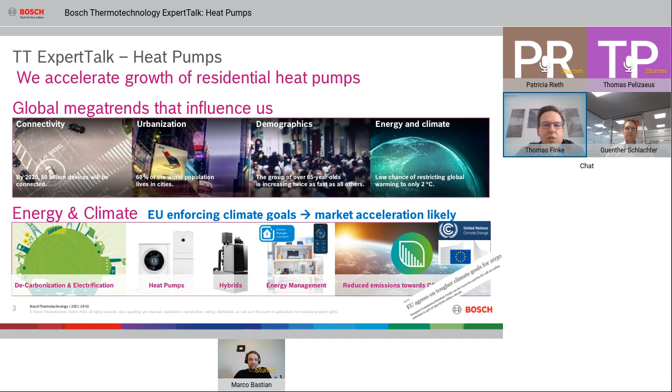Having a look to the market of heat pumps today, we already saw a sustainable growth over the last year. The last decade has shown a really good decade for heat pumps. Nevertheless, on the right-hand side, you can see that still only 15% of share is by heat pumps made in the European heating market. So there's much more potential.

This is also underlined by looking to the following three graphs, where we can see the share per country in terms of percentage. There we have countries, especially high up in the north of Europe, where we have a good share of heat pumps in the residential heating market. Some markets exceeding even 90%, like Sweden, which Styrbjörn will later elaborate upon. But then there are markets with only double-digit or even single-digit figures in the lower numbers down there, so giving a high potential for the heat pump market there to come for Europe to really make an effort in achieving EU climate goals by 2030.

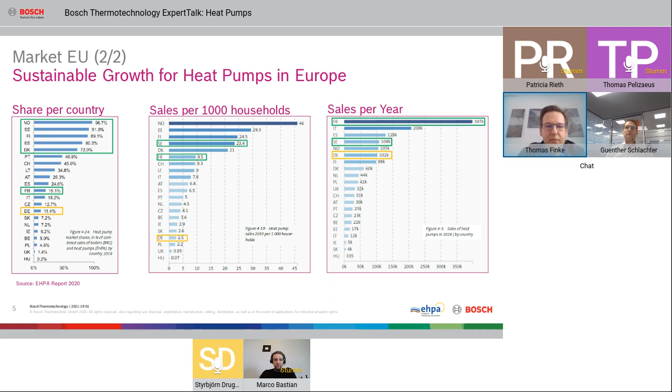This is leading us to our vision. So which part does Bosch want to play in this more and more electrified market targeting to achieve climate goals? Our vision is to electrify European homes. Our vision is to build the energy transition to build a better life for us and the generations to come. Or as Greta Thunberg says, we only have one world.

I'm lucky to have two daughters, but my motivation is that we are really giving to them a good and clean world. Therefore, we are enlarging our portfolio. We are investing hugely into our sales organization to partner the way to mass deployment of heat pumps in Europe, in which we are investing more than 100 million euros.

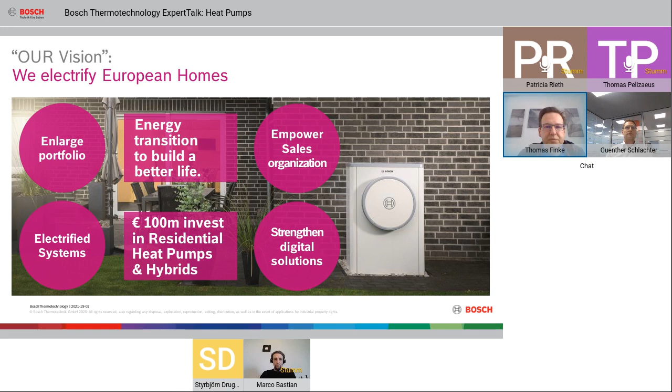Having said that, we are investing so much money into heat pumps. I also want to address a bit an organizational topic or a discussional topic which is ongoing at the moment in Europe. We see too many clashes of technologies, like is it now hybrid the best one, is hydrogen the best one, or heat pumps the best one?

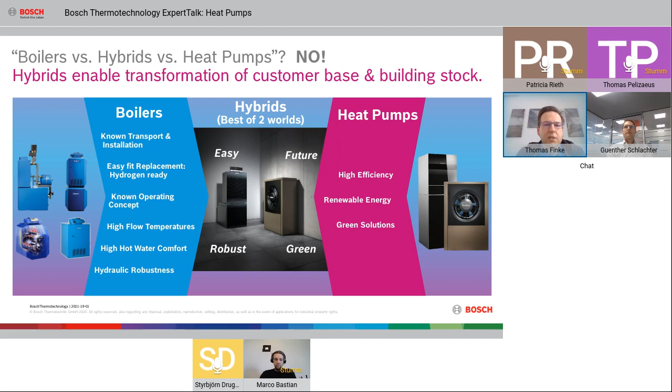My simple answer is climate change is driven by multiple aspects. Therefore, we need multiple weapons against climate change. Hydrogen, heat pumps, and hybrids are all solutions which can help us to decelerate climate change and to build a better life for our kids and next generations to come.

Our approach is that we have to address the markets according to their needs, to give customers what they want. And therefore, we have dedicated our approach into the 3 regions of Europe, namely North, Middle, and Southern Europe. Whereas now Styrbjörn will give us an insight how our marathon has started towards reaching EU climate goals 2030 and what role Bosch is playing into that. Styrbjörn, please carry on.

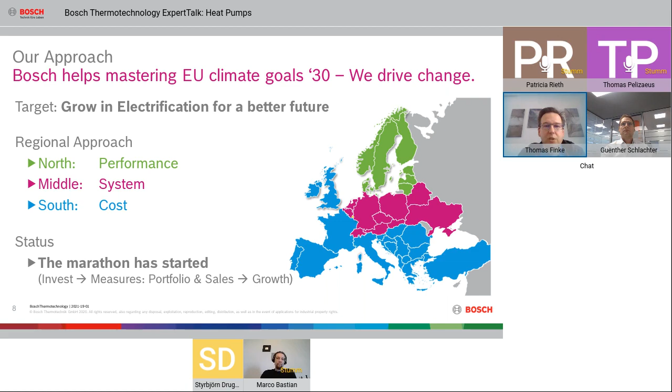Hello, everybody. Please confirm that you can hear me now. Am I on? Do you hear me? Yes. Can you hear me?

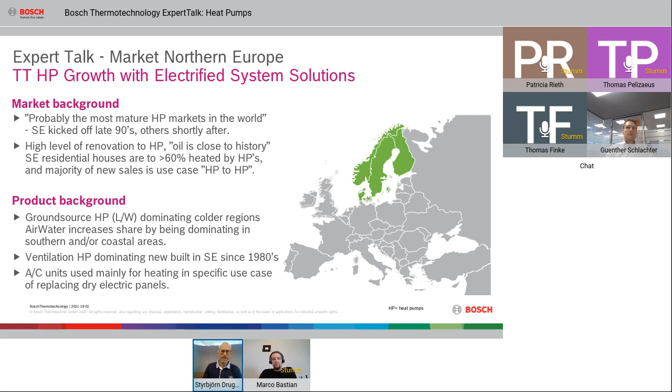This is zooming into the Swedish situation, basically residential focus, and here you see the same figure, 59% in 2018, meaning that we are currently above 60% using any type of heat pump. Runner-up to the heat pumps is wood pellet, which consists of 20%, followed by district heating of about 15%. So existing houses are dominated by heating by heat pumps.

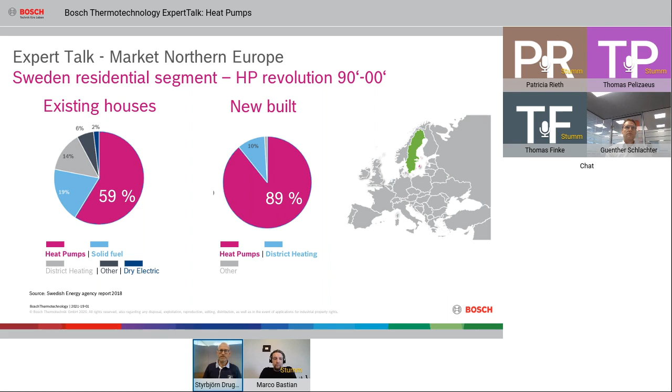In the new build sector, almost 90% are using the heat pump as the heat source when you build a new house. This is a mix of the utmost favorite, the ventilation heat pump or exhaust air heat pump, as we say internally, followed by liquid water to some share and a minor part air water. Runner-up there also is district heating in the urban areas, of course. So next slide, please.

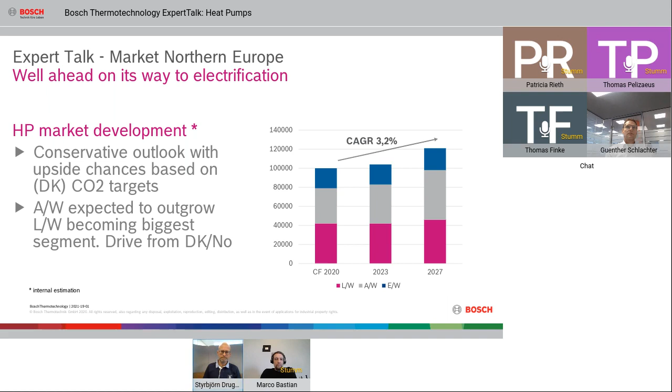So then you can, for yourself, imagine that the use case will also shift, considering that it's a market which is consolidating its electrification. As of now, our own in-house predictions say that about every fourth heat pump sold is in a use case where you shift an old heat pump to a new one. In '27, it will be almost half of the sales that consist of this heat pump to heat pump sales. And that has an impact on how you sell the product and what benefits the customer gets out of it.

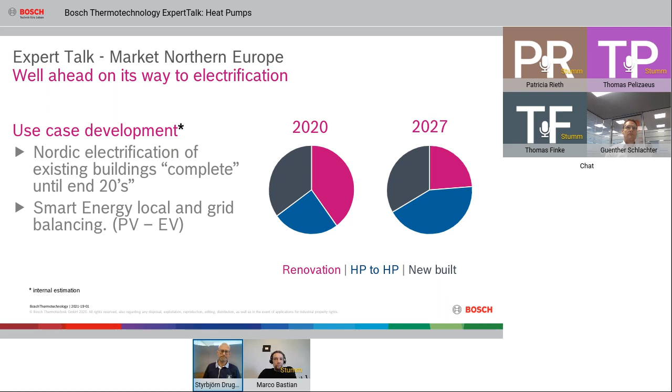Also, one takeaway is that when you have such a high penetration of heat pumps in an electrifying market, there will also be a need for integration towards electric vehicles. For the last December month in Sweden, 40% of the newly sold cars were actually EVs. So 40% of total sales was some kind of EV car. So that is one takeaway when it comes to what it means to be in an electrified area like the Nordics are, and will be even more so in '27. So next slide, please.

Okay, for the use case in terms of new build and existing building, what are now the expectations of customers wanting to use heat pump technology in the future? Well, for the new build, it's about finding the way to integrate even more into a newly built house, following the expectation of hassle-free operation, making it easy to install towards the interfaces, using as little space as possible, because every square meter counts in a new built house. So the new build sector will continue to drive a big share of the volume in the Nordics, emphasized by the development of the heat pumps, of course.

Existing build: you just learned that the majority of the sales was actually heat pump to heat pump. This means that the customer took the big benefit in the first place. The most delightful point is when you install the heat pump for the first time, because then you get the benefit of the savings. The second time, you have to work on other aspects. You can slightly improve the savings, but the majority will be to delight the customer even more by having a very silent heat pump that is delightful to use and easy to work with in relation to your other smart home devices. So those are examples of how a market in an electrified situation evolves in terms of expectations of a new heat pump being installed, whether you are in new build or existing build.

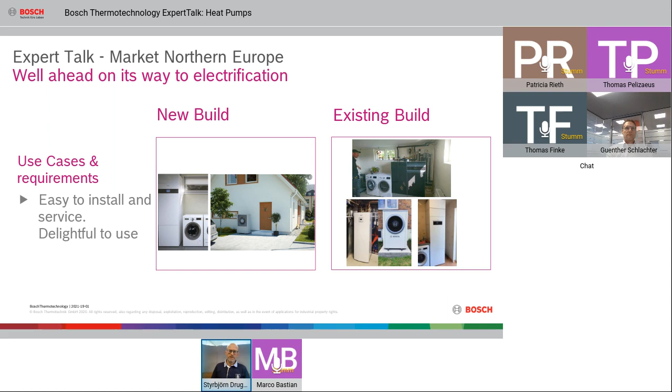So with those remarks and insights from the Swedish and Nordic markets, I would like to hand over and get more information and insights on the mid-European markets. So Guenther, fire away. Thank you very much, Styrbjörn. My pleasure to give you some insights on the European mid-market.

You saw that the northern part already had a 60% share of heat pumps in the building stock. That's quite different in the middle part. In Germany, as an example, we had last year the first 1 million heat pumps sold. That reflects a share of only 5%, because we have 20 million buildings in Germany. And what you saw in Tom Finke's figures was that in Germany, the share of heat pumps among overall heating devices installed is roughly 19%, whereas in Switzerland it's quite high already with a share of 45%. Good news is that in Germany, the share has increased from 15% in 2018 to 19% in 2020 already. So there is strong growth of heat pumps in the building market in Germany, for example.

In the new build, the share of heat pumps is already the strongest and is higher than fossil. Essential is that we offer whole system solutions for all use cases; what the use cases consist of, I will elaborate later. One driver for strengthening the share of heat pumps is the subsidies in place, for example in Germany, and strong regulations to protect our nature, like in the Netherlands, Switzerland, and Austria. In addition to the climate targets, we also want silent installation with heat pumps, and there are very tough requirements in place. For example, our target is only 35 decibels at a distance of 3 meters from an air-water heat pump. That is about the noise of a refrigerator.

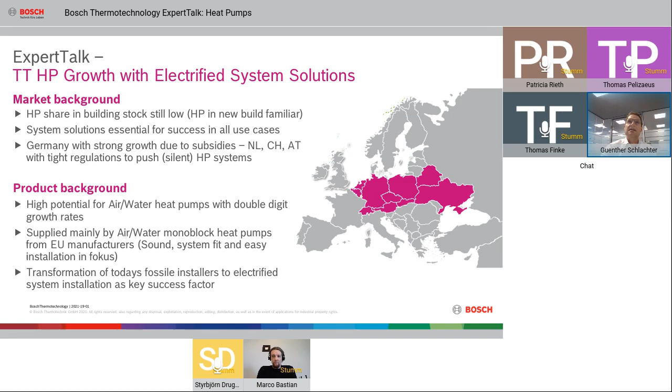So very silent. The product background is that for middle Europe, air-water heat pumps show the strongest growth. They are mainly supplied by European manufacturers with the main focus on sound, system fit, and easy installation. Easy installation is actually crucial in order to transition the installers who today install fossil solutions to electrified solutions. And we want to make this as easy as possible in order to strengthen the heat pump share.

Looking at our electrified house, you see that this consists of a photovoltaic system. So you are producing your own electricity and you're distributing the electricity, ideally with the Bosch Energy Manager, into your electric vehicle, into your heating system, and into your home appliances like dishwashers and washing machines, etc. The Energy Manager always gives you the advantage of full transparency of your energy flows, and in addition, it optimizes your own energy consumption, so you're saving money and you achieve the best economical and ecological value.

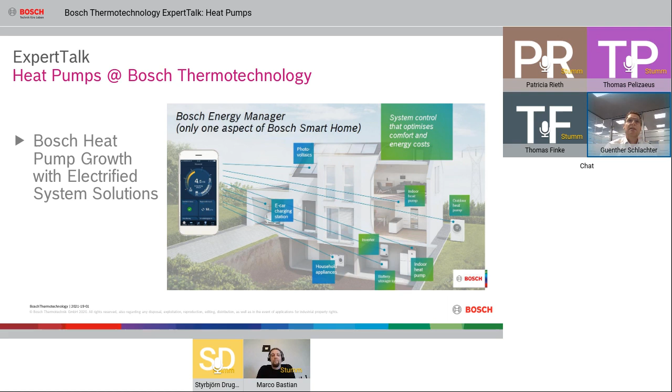Looking at the growth, you see that in Germany, we are growing from roughly 110,000 heat pumps in 2020 to 270,000 heat pumps in 2027, which reflects a CAGR of roughly 14%. And the strongest growing technology is the air water heat pumps. The liquid water you see on the bottom, consistently at roughly 20,000 heat pumps.

The reason why air water is growing stronger is because of the easy installation. You don't need to dig a hole in order to get your warmth out of the ground, but you are getting the warmth directly out of the air. Subsidies in place strongly push the air water systems and will drive that growth for the next years in the double digits.

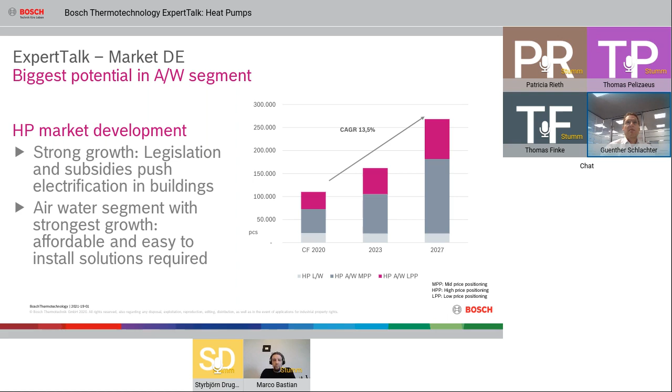Now looking into the use cases, you see that in 2020, the 111,000 heat pumps, at the example of Germany, were distributed half-half in existing build and new build. Looking into 2027, you see that the overall market grows by 14%, which is 111,000 to 270,000 units. Both use cases are growing.

New build will grow by 20,000 units to 75,000, whereas the existing build clearly grows strongest, from 55,000, almost fourfold, to close to 200,000 units. And this is driven by very strong subsidies in place. And as said before, some regulations help there as well.

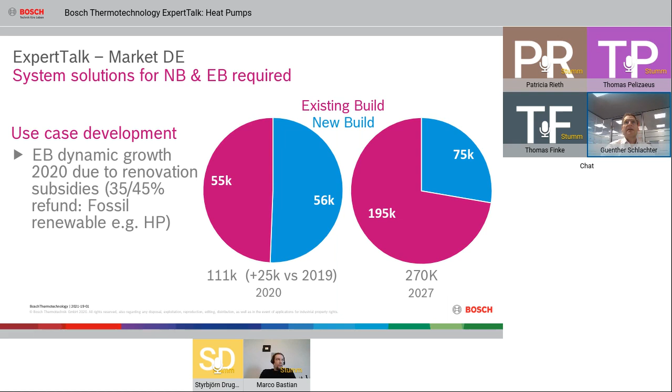Now, you will ask yourself the question, why do we elaborate on new build and existing build? The reason is because the customer requirements are quite different. In new build, you have a builder to decide upon which heat pump or which technology is integrated, and this is done very strongly based on a low installation cost. So cost is key in new build.

Then you need very silent heat pumps. As you can see on the pictures, the installation space is quite small and the housings are very close to each other, so you need very silent heat pumps. And the installation inside the house needs to be very compact, and it is ideally not just focusing on a heat pump, but as well on the ventilation system that helps you improve the climate in the new build. Easy installation, as mentioned already, is always key.

In the existing build, you need to make sure that you're focusing on little noise, because so far you were not used to any noise coming from your fossil devices. Easy installation, because the installers are installing fossil today and they need to transform into electrified. And your heat pump system has to fit with radiators, for example, and into the overall space that has been used so far by your fossil solutions.

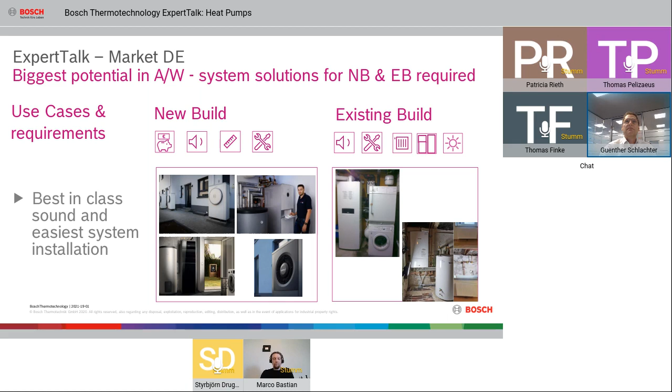You can see on the left-hand side pictures already diffusers. A diffuser is hiding away the ventilation of the outdoor unit, so you can't see any ventilator moving, which already leads to reduced noise emissions. And we are offering the MPP segment for indoor and outdoor solutions, focusing on easy installation and little installation space.

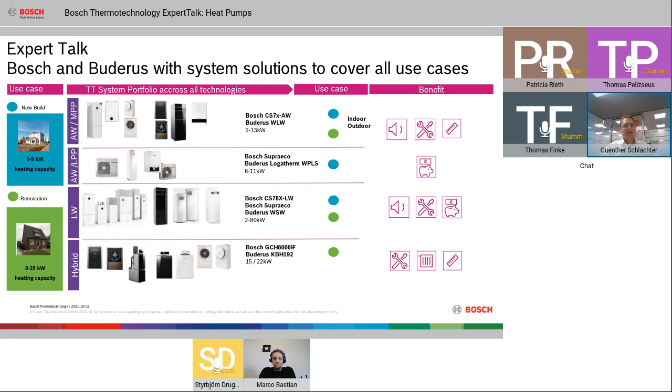Okay, looking at the multiple solutions, we're looking forward to getting some insights from Marco Bastian on the southern situation.

Thank you, Guenther. Thank you for the insights, and I will continue with the focus on the Southern European area. First, a word to the regional situation with UK and Ireland.

We decided on having UK and Ireland as a part of our electrification activities for Southern Europe, simply because, first of all, price positioning in UK and Ireland is much more likely to be the same as in the Southern European areas than in Middle European areas, and the product choice in the UK also is very much the same as it is, for example, in France, Italy, or Spain. So it makes much sense to have UK in our Southern European activities.

Giving a general background about the situation in the Southern European market, and besides that, I just mentioned the UK being part of Southern Europe because of the similar products. It is still a very inhomogenous market, and it's an inhomogenous region in terms of legislation, in terms of heat pump use and activities in renewable energy.

For example, countries like France, Italy, and UK, they steer very heavily towards electrifying and CO2 emission reductions and so on, by having legislations or subsidies in place that push heat pump use in houses, in renovation, and in new build. But on the other hand side, we have, for example, the Balkan region, so everything east of Italy. I would say there's not much activity ongoing, at least steered by the government.

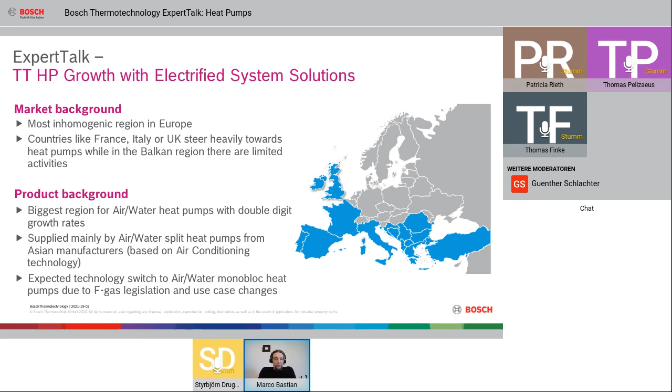Next slide, please. In terms of market growth, we see here one of the most growing regions in Europe, especially on the air-water LPP side, as we call it. LPP stands here for low price positioning. It is currently the biggest part of the sales in Southern Europe, but it will still grow to a very, very high share, up to almost 500,000 pieces. The air-water MPP and HPP, which means mid-price and high-price positioning, is despite that also growing, which is due to the use case, which I will show you later.

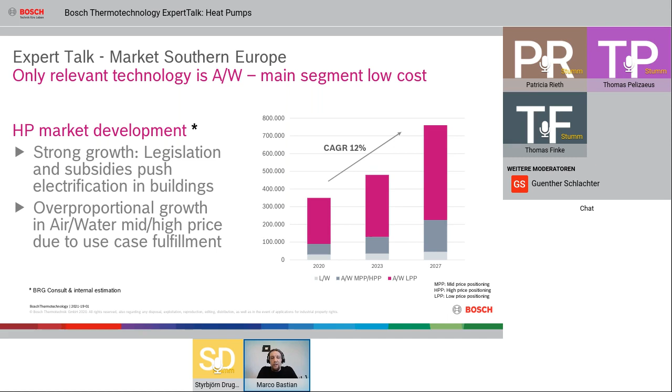Liquid water heat pumps are very regionally used in the Southern European area and are a niche market, mainly used in, for example, northern Italy in the Alps, or in France in the Alps. Next slide, please.

As I was mentioning, the use case development is currently in the Southern European area steered by legislation, especially in France and Italy, which want to exchange all oil boilers existing in the housing stock. And by that, they have subsidies in place that push heat pumps into the existing building market. Currently, we have a sales number of 250,000 pieces going into existing buildings and 100,000 going into new build.

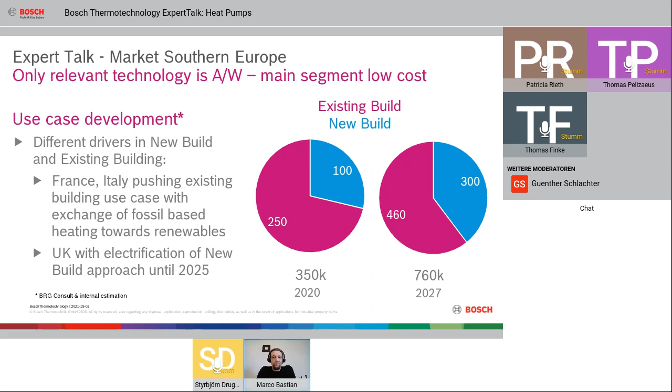The prognosis until 2027 is that the existing building market will almost double to 460,000 pieces, which is mainly steered further by legislation in France, Spain, and Italy. But you see also an overproportional growth of 300% in the new build market, from 100,000 to 300,000 pieces, which is due to the UK legislation, which electrifies the new build market completely by 2025, meaning all new build houses in the UK from 2025 onwards will be using heat pumps. Next slide, please.

And this leads us also to look at the main requirements of the use cases, new build and existing building in the Southern European market, where the focus is very much on costs, meaning in the new build area, we have a very high push on costs in the project businesses, meaning that the house building companies have single contracts with heating producers, which push the costs down very much. And as we have an example here from the UK market, there we will see a very high impact on the cost targets for such products.

On the other hand side, what is also different to the Middle European area, we have a very high demand for cooling, especially the more south you come in Spain and in Italy. Cooling is one of the main drivers for the use of heat pumps compared to other heating devices.

Besides that, also important is that it fit in place and easy to install. If we have also an additional look at the UK, what makes it very special there is that even in new build, you will have a radiator distribution and not underfloor heating, as it is standard in the rest of Europe.

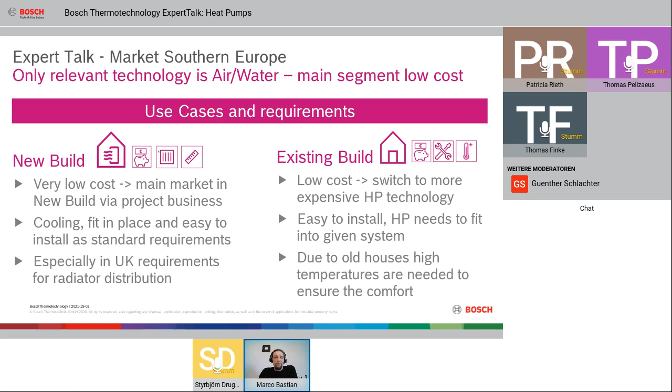Also, the high temperatures are important to be met by the heat pumps due to the situation that the insulation is not so good in old houses. Most likely you have a radiator distribution, and by that you need higher temperatures to fit the demand. Next slide, please.

What we are currently offering in the Southern European area, not only the Southern European area, but mainly here, is our low-cost heat pump, the air-water split, where we have 7 different capacity sizes, currently from 4 to 15 kilowatt, meaning being able to serve the new build market in the low outputs and the high existing building market in the high outputs,

with very flexible indoor unit systems where we can serve the existing building market, especially with the wall-hung units with electrical heater, or that can be used with a second heating source, or for new build, very compact system with tower with integrated domestic hot water cylinder, or with a combination with solar. Next slide, please.

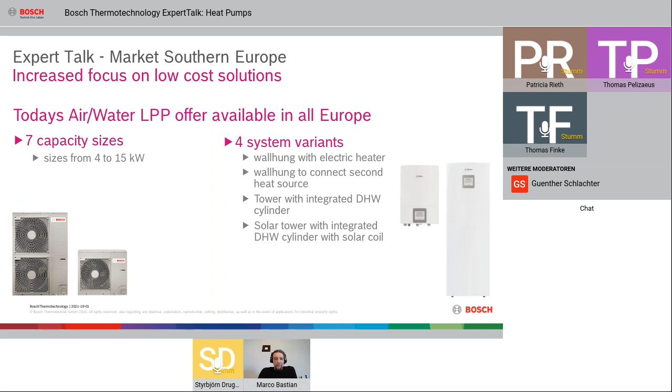And last but not least, also having a view into the future. Mid of last year, we established a joint venture together with the Israeli air conditioning producer Electra Industries. And we are going to establish here a common approach for targeting the low-cost market of heat pumps in whole Europe, but of course with a focus on the Southern European area.

By that, we will also divide the development activities for the system approach to Aveiro, Portugal, where we have a Bosch plant where this development will be done, and of course with the traditional plant in Israel from the Electra side, where the outer units will be developed and produced. By that, we are also investing 30 million euros into a new facility and a new development, so that we will be ready with this strong partnership for the future in Southern Europe.

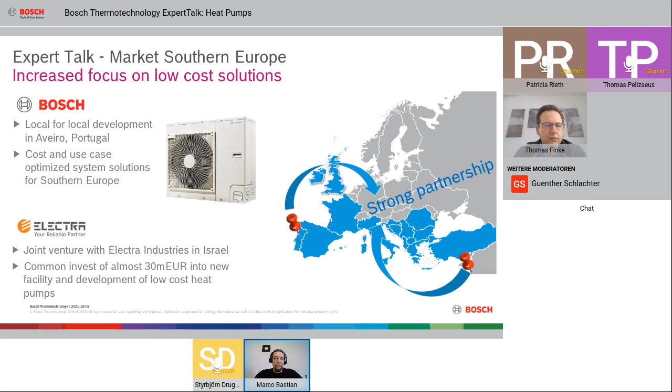And now I will hand over to Tom again to wrap everything up. Thank you so much. Good. Thank you, Marco.

So, summarizing, I think one can tell that the marathon towards reaching EU climate goals in 2030 has started. I think we also could underscore positively that Bosch is definitely a part of it, and we are driving this change, all in the context of our vision, invented for life, and that we build a better life by energy transition. The market has shown that heat pump technology is ready.

Politicians have acknowledged heat pumps as being one of the solutions of the future. And this leads to sustainable growth, which we have seen in recent years. Bosch is participating in the growth of the recent years. We are investing 100 million euros in our portfolio, in sales, into our operations. Nevertheless, we are not there yet.

To reach EU climate goals, we need to enable mass deployment, meaning to sell and bring to the market more than 1 million heat pumps per year, more in the ballpark of 1.5 to 2 million heat pumps per year. There, we work with our partners and via the associations of, for instance, EHPA and BWP, to overcome the obstacles which we still have in Europe, namely CO2 pricing, the electricity taxation, the installer base, because we also see it as our duty to take our installers on the road with us towards electrification, towards a better life.